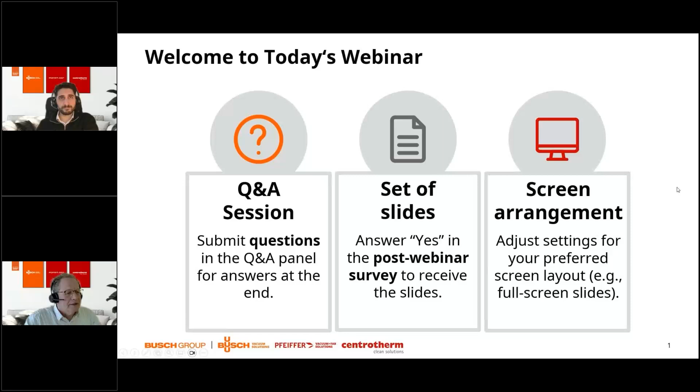Let me introduce your hosts. That is Özkan Güneş. He is Market Manager Analytics at Pfeiffer Vacuum, responsible for all makers of analytical instruments, because most of these instruments come with vacuum technology - pumps, gauges, everything. Özkan is very well aware of what needs to be done to equip GCMS, MS, or whatever kind of instrument with vacuum technology. Thank you very much, Özkan, for being our host today.

Yes, thank you, Andreas. And your second host is Andreas Schophoff. He is the head of the market segment R&D, and he and his team are responsible for the R&D customers of Pfeiffer Vacuum worldwide. This includes, for example, universities or research institutions that conduct research using vacuum technology. His role involves supporting these organizations by providing vacuum solutions to their scientific and technological needs.

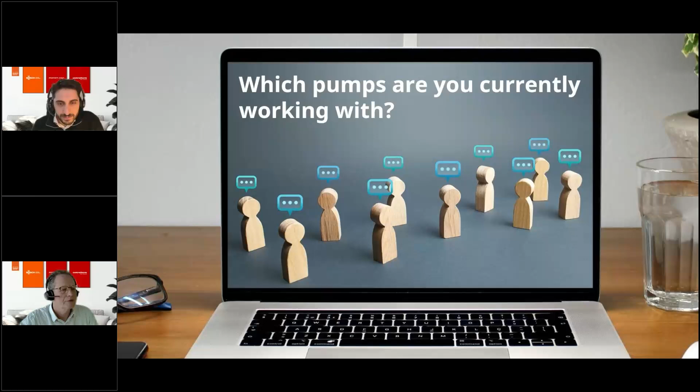Vacuum in a lab is an interesting thing, and we would like to look at, first of all, where actually vacuum is used, in what kind of instrument. We're looking at vacuum equipment, vacuum technology as a kind of enabling technology.

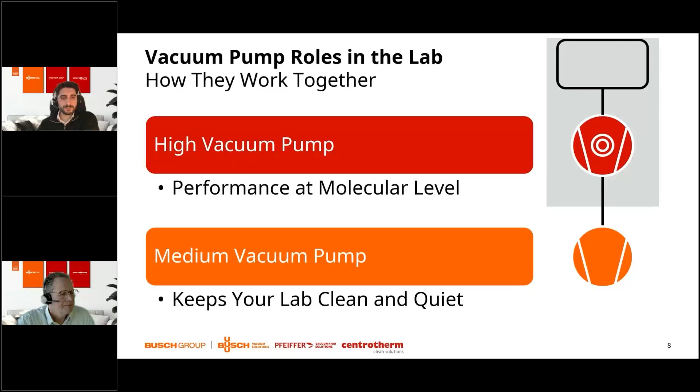And that can be anything. For you, we were thinking it's very important that this kind of pump is low noise, because quite often you're having more than one instrument in your lab, and you're very close to the instrument. So if it is clean and quiet, that could help.

So just to look at the typical parameters - one of the typical parameters is the final pressure these pumps can actually reach. Starting from left to right, we're looking at the rotary vane pumps, and there they generate vacuum starting from atmospheric pressure down to 10^-3 hectopascal. The diaphragm pump is a dry pump, but it cannot reach such a low pressure, let's say 1 hectopascal. The scroll pump is absolutely comparable to the rotary vane pump, and it can go down into the same kind of pressure regions.

The claw pump, yeah, that's another kind, but it's pretty big - you cannot figure that out. Multi-stage Roots pumps come into the 10^-2 pressure range, and a screw pump - but you can see here to the very right, all these kinds of pump technologies would be sufficient in order to combine with the turbo pump.

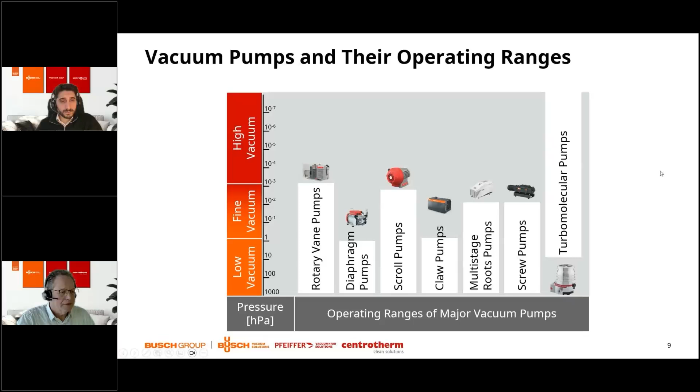Just to give you an idea, let's say you're having a vessel with 1 meter cube, or 100 liters, sorry, 0.1 meter cube, and you want to evacuate that, having a pump with 10 meter cube per hour pumping speed. Then it would take something like 2.8 minutes to get to 10 millibar from atmospheric pressure. And if it is just 1 meter cube per hour, then it takes just 28 minutes. Just to give you an idea how pumping speed affects the time used to evacuate such a chamber.

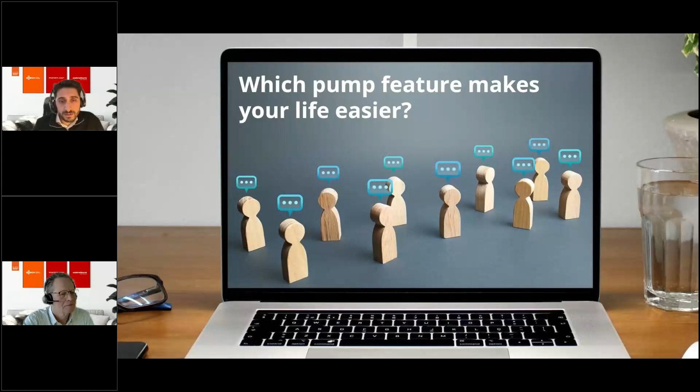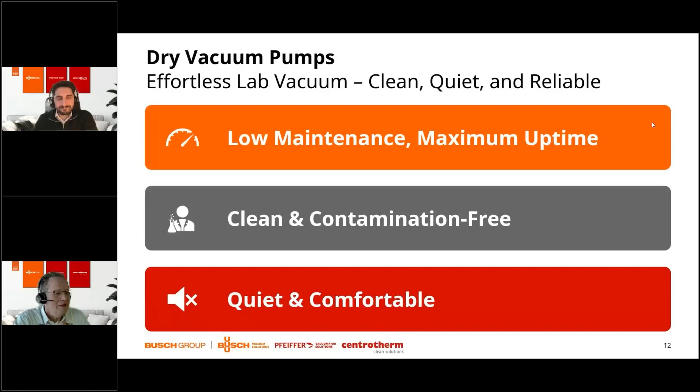Can show it in our next slide. Yes, very well, like you said, Özkan, it is very much what we have expected. So we're trying to read your mind up front. And honestly, I think we did a good job because, yes, we were thinking: what makes your life easier? Low maintenance, maximum uptime, so just switch on and forget.

And secondly, quiet and comfortable. That is something we've mentioned already. When you're very close to the instrument, when you're having maybe multiple instruments in one lab, it can be really annoying if it makes an uncomfortable sound. Clean and contamination free, then it already comes to your application. Sometimes it needs to be very clean so that your measurement is not influenced by any kind of oil backstreaming, something like this.

So thank you very much for coming up with the results we were guessing you would have in your poll.

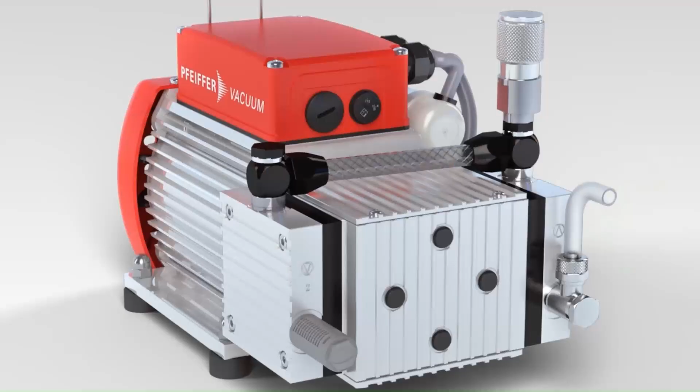Yes, and this leads us to the first pump among the three that we will present in today's webinar. It is the diaphragm vacuum pump, and we have a video to illustrate its working principle, where you can see a so-called MVP from the Pfeiffer Vacuum portfolio.

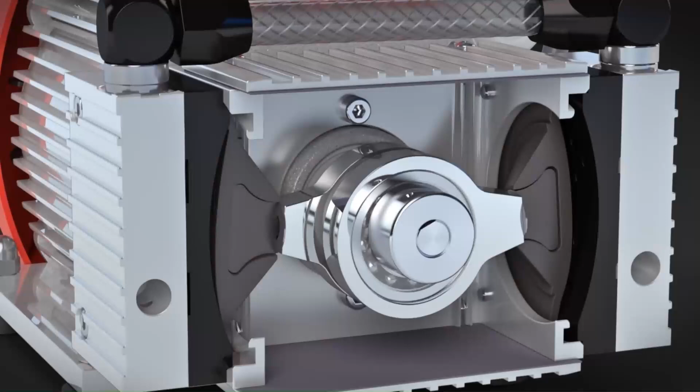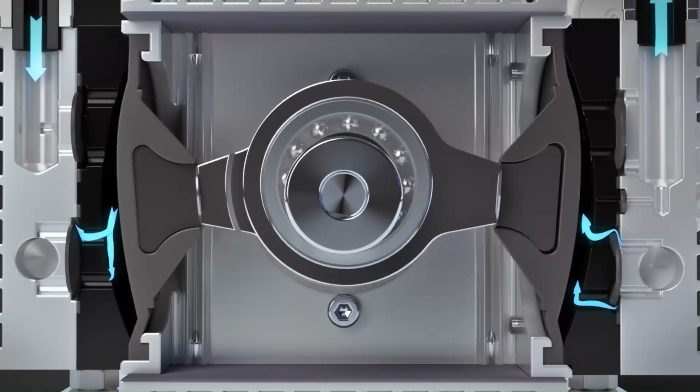So there we are. The blue arrows represent the gas entering the pump and making its way through it. But to understand how it works, we can take a look inside the pump. We see a crankshaft-driven rod that is moving the diaphragm up and down, or rather to the center and outward. We can also see that the diaphragms are moving in a wavy pattern to push the gas towards the outlet. And looking at these round valves, we see that they are opening and closing alternately, and when the inlet valve is opened, the outlet valve is closed, and vice versa.

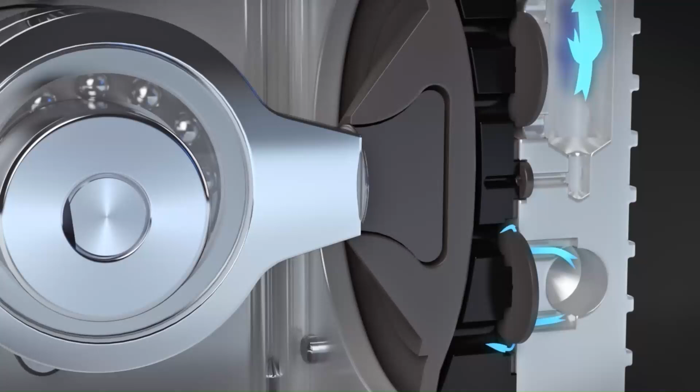And we can see the same diaphragm setup at the left side, meaning that we are dealing with a two-stage diaphragm pump here. It is important to mention that the final pressure achievable with the two-stage pump is lower than that achievable with one stage, because it is compressed with an additional stage.

So coming back to our presentation, we can see here some benefits and features of diaphragm pumps. First one is on-site service that is possible. It can be done by the operator, allowing the operator to easily replace the diaphragms and valves by himself.

We as Pfeiffer Vacuum recommend the diaphragm replacement every 2 years, but depending on the application, rarely used diaphragms can be changed after 4 years. This is also possible. It always depends on the application, on the gases that you are pushing through your pump.

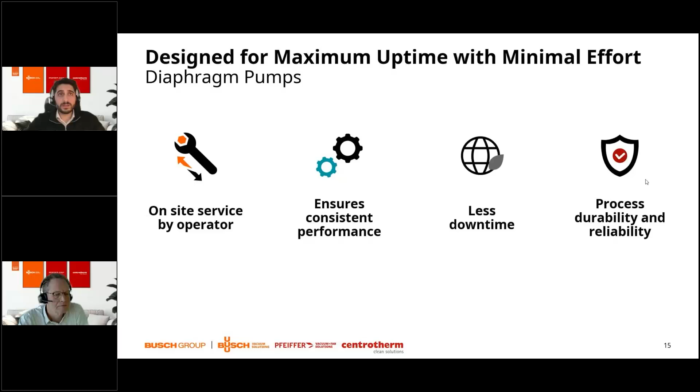You have less downtime as the diaphragm pump operates without oil, so it's a completely oil-free pump. You have a clean vacuum, and since no oil is required, you also don't have any oil changes, which is clear. The pump has a very high process durability and reliability. There is an integrated magnetic gas ballast, which reduces the risk of condensation, because condensation can be harmful to vacuum pumps by damaging the components of the pump, leading to a reduction in performance.

Furthermore, it is possible to have an automated gas ballast. This means they don't have to do manual adjustments. You can just tell the pump with this optional gas ballast to have gas ballast in certain intervals. It's just setting of some parameters very easily. You can also have a retrofittable piezo Pirani sensor, which measures the intake pressure, enhancing the functionality of the pump.

Quiet operation and low vibration. Noise always results from vibration, and this pump has low vibration, which leads to quiet operation ranging from 52 to 65 decibels. This is comparable to the sound of a normal conversation.

And last but not least, diaphragm pumps have a compact footprint, fitting well on workbenches without space concerns due to their small dimension.

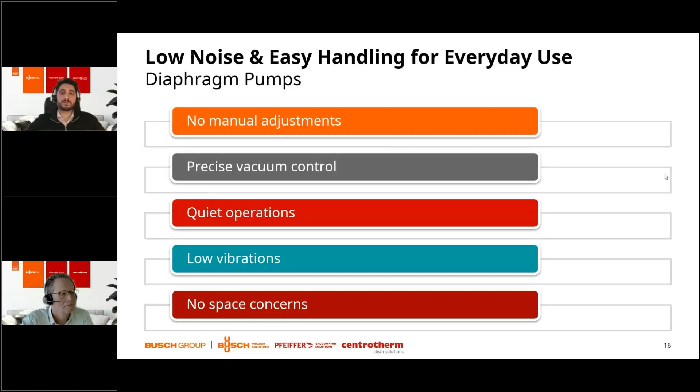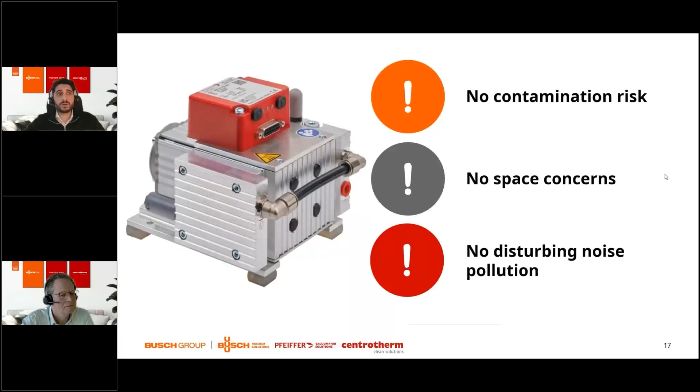So to sum up our key findings: we have no contamination risks, no space concerns as we have a very small pump, and also because of the low vibration, we have no disturbing noise pollution.

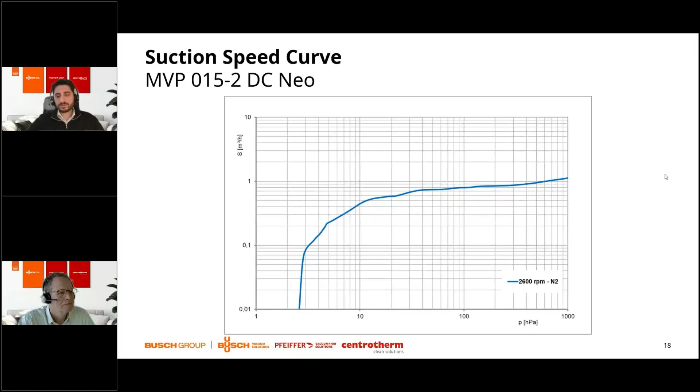And when it comes to some higher pumping speeds, you can take a scroll pump. Andreas, you are our expert for scroll pumps, could you tell us something about it? Yeah, thank you very much, Özkan. So let me talk about scroll pumps.

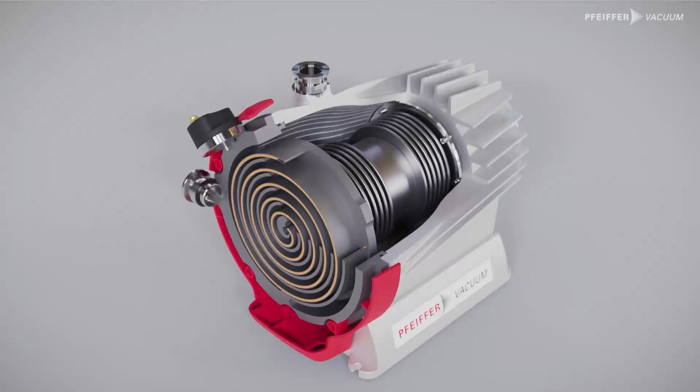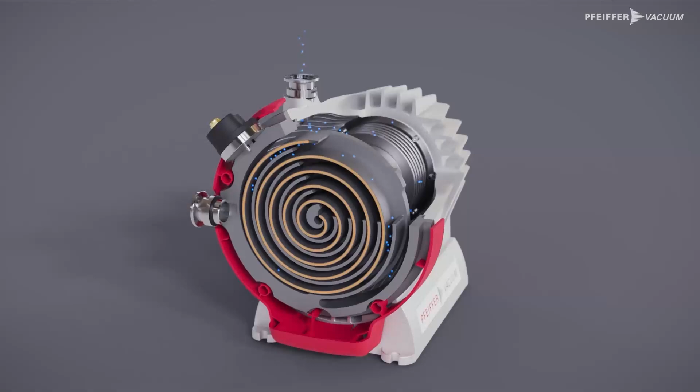That is, let's say, quite new technology when it comes to vacuum pumps, and I would like to explain how it works. Here again, we're having a bit of a movie, and you can see here there is a rotor and a stator, and it looks a little bit like a spiral. The light brownish one, that is a tip seal, which seals against the stator and the other way around, of course. Here you see very well how it works.

So the bluish parts, this is the gas, and the gas is being compressed from the outside towards the inner part of this spiral thing, this orbiter. And the great...

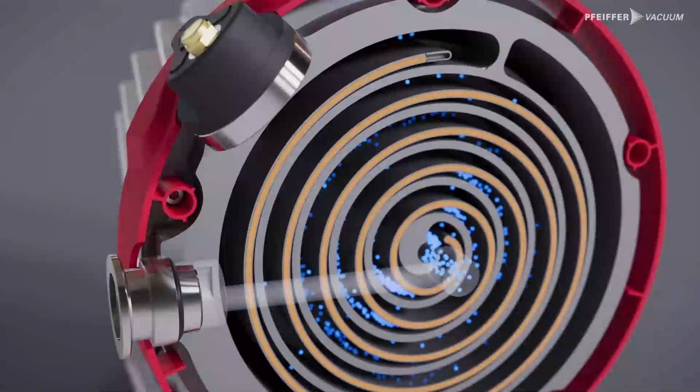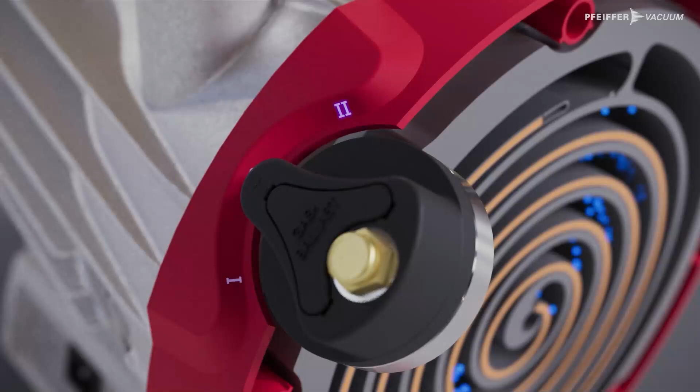invention of this scroll pump is that there are multiple compression stages. That means pretty much all these different gases like helium or heavy gases like nitrogen are being compressed in the same way. So if you're having a GC, for instance, and you're having helium, that doesn't really matter for this kind of pump, it works.

Here, that is the gas ballast valve, which is very good in order to get rid of the water vapor, and that helps to get rid of other kinds of vapors as well. Thank you very much, Özkan, for the movie.

Now let's have a look at the main features and benefits. Again, it is an oil-free pump, pretty much the same as the diaphragm pump. It has some built-in intelligence because the fan, for instance, the cooling fan is sensor controlled, so there's no overheating. There is no risk of damage.

Just to give you an idea, I mentioned that tip seal, and the pump is designed that way so even without a tip seal it could run. Of course, it would not have any kind of compression, but it would not be damaged. There would be no mechanical damage due to the missing tip seal. And therefore, last but not least, you would not have any kind of unexpected downtime.

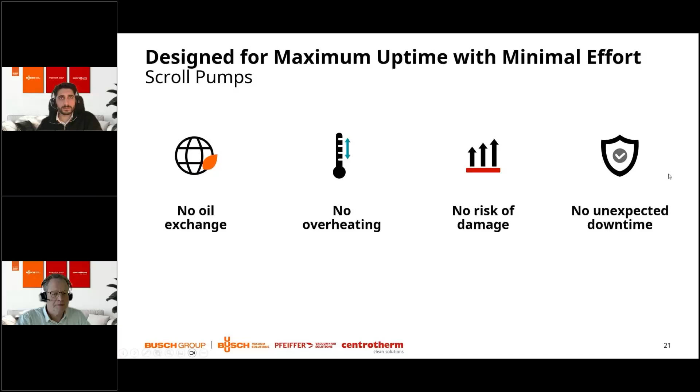So it would be very quiet, very low vibration. It is optimized for vapor handling. It has this smart operation, so with the help of built-in sensors, with the help of a gauge, it is very clever. The intelligence is already built in. It has this seamless integration, if you want, together with the turbo pump. A little cable in between that will help.

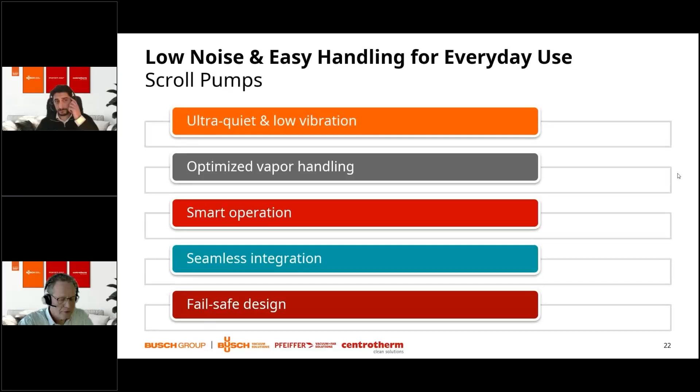And it is this fail-safe design. So even without taking too much care, it will not be damaged, even without having any kind of tip seal. So in a nutshell, there is no contamination risk because there's no oil. Even wrong operation would not have any kind of risk that oil or hydrocarbons would get into your analytical instruments. There is no oil spill underneath because it doesn't come with oil.

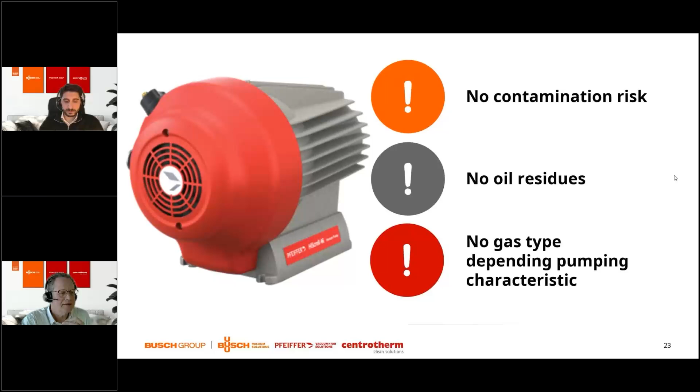So it is the perfect drop-in replacement for oil-sealed pumps. For all these people who would like to get rid of oil-sealed pumps, where they very often need to do maintenance, oil exchange, or deal with oil spills, this can be the perfect drop-in replacement.

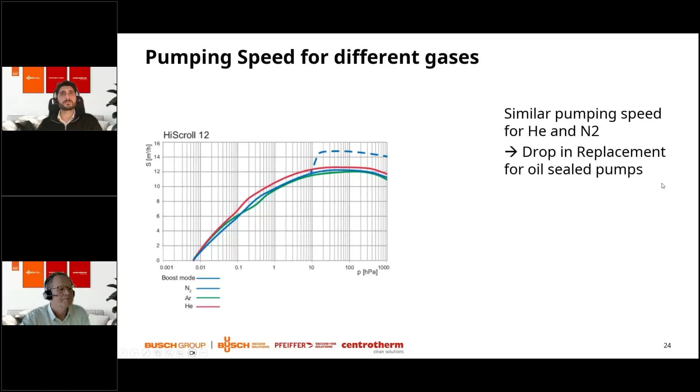Okay, it's gone. Now back to you. You would like to introduce the multi-stage Roots vacuum pump.

Correct. Exactly. So this is, let's say, the biggest pump among the three that we are showing you today, which can reach the highest pumping speeds. And also here we are having a video to get a better understanding of how it works.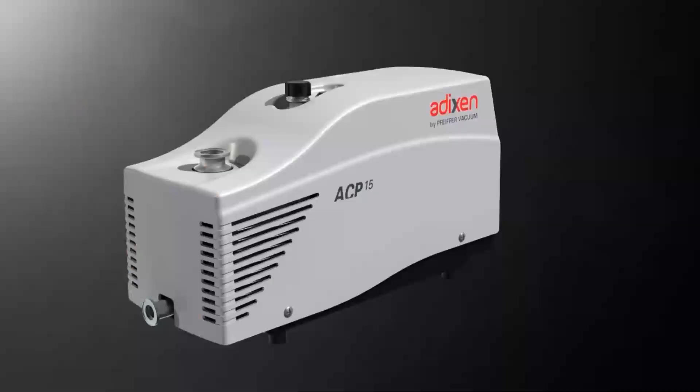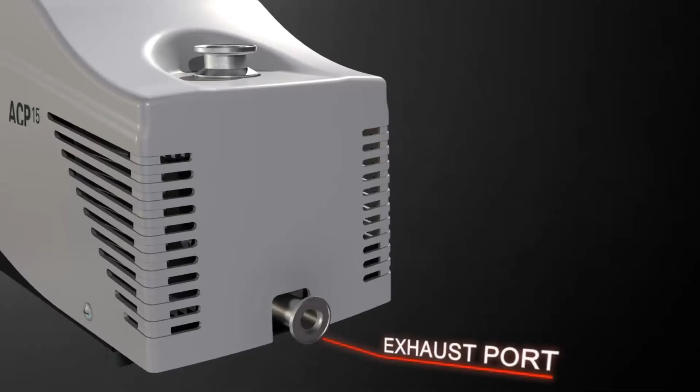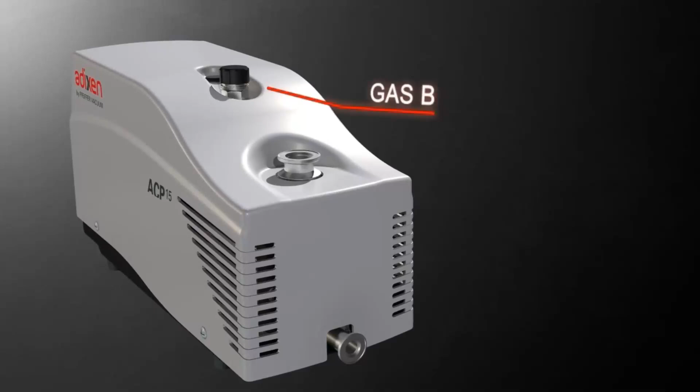And there it is. This is an ACP15 from the Pfeiffer Vacuum portfolio. We can see the exhaust port on the bottom side, the inlet on the top side. And looking at the rear side, there is a frequency inverter and an air cooling system. Also here we have a gas ballast on the top side. To understand how the pump works, we will take a closer look inside the pump.

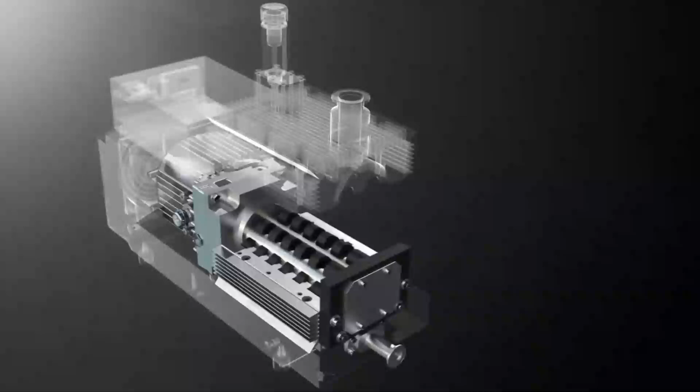And there we see two synchronously counter-rotating rotors. They are rotating contactlessly without any friction in a single housing. And the rotors have an 8 shape, meaning they look like an 8, and they are separated by a very narrow gap. And as the rotors spin, the gas is drawn in through the inlet and enters the pump.

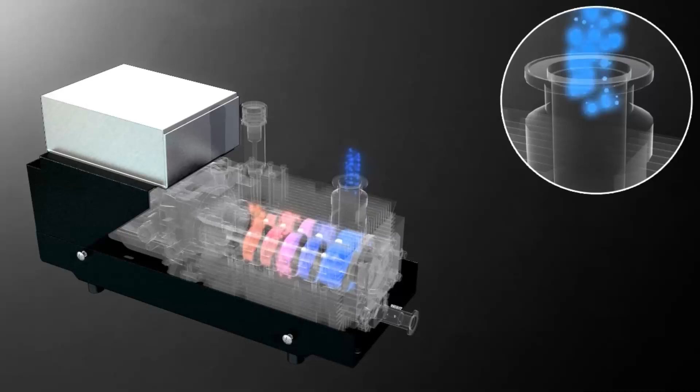Then we see it makes its way through all these stages. And stage by stage, it is getting more and more compressed, which is shown here by the change of color from blue to red. This stage-by-stage compression results in a higher pressure differential and an improved overall performance.

Features and benefits of multi-stage Roots pumps. As mentioned before, we can reach very high pumping speeds, meaning that you have a very short pump-down time. As mentioned in the video, there is no friction in the suction chamber, allowing the multi-stage Roots pump to be operated at speeds up to 6,000 RPM and allowing for rapid evacuation due to their high pumping speed. Optimized efficiency means that these pumps maintain low power consumption despite this high pumping speed.

And as shown in the video and explained, there is no friction between the rotors, which eliminates mechanical wear. Also, this pump works oil-free, so no oil changes are required. And despite the high pumping speed, it has a space-saving footprint, making it very easy to integrate into laboratory environments.

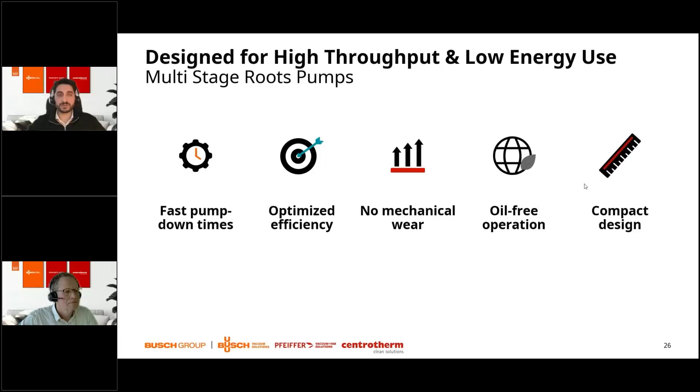Furthermore, constant vacuum stability, because they offer consistent vacuum stability, ensuring the user reliable long-term operation. They can be continuously operated at high inlet pressures, which is no problem for them. And the frequency converter, shown in the video, enables the operator to optimize energy consumption and reduce the noise level. It is available in both single-phase and three-phase variations, ensuring consistent operation parameters regardless of the power supply or the mains frequency.

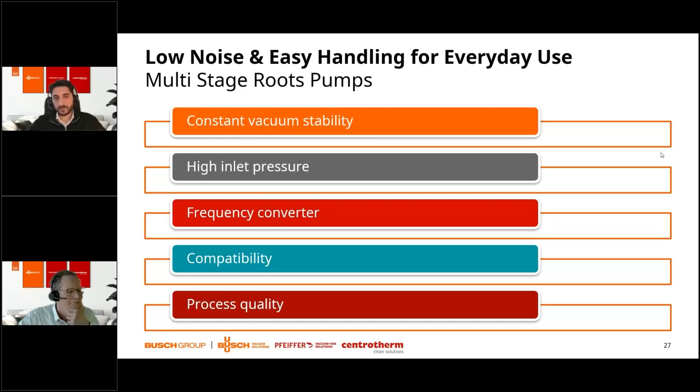You achieve excellent process quality performance due to the particle-free and oil-free operation. And also here, again, our key findings for this pump are: no contamination risk, and because of the frictionless operation, we have no mechanical wear and no particles in our vacuum system.

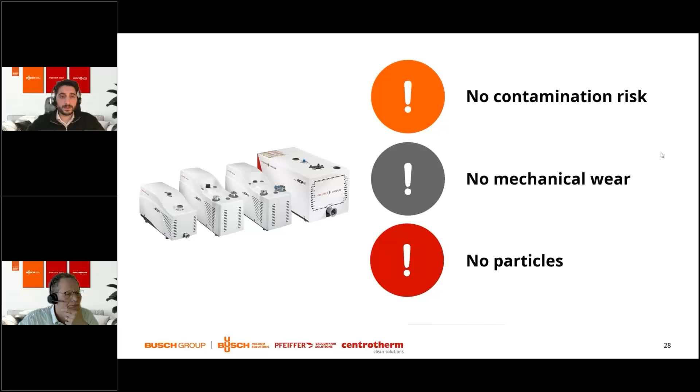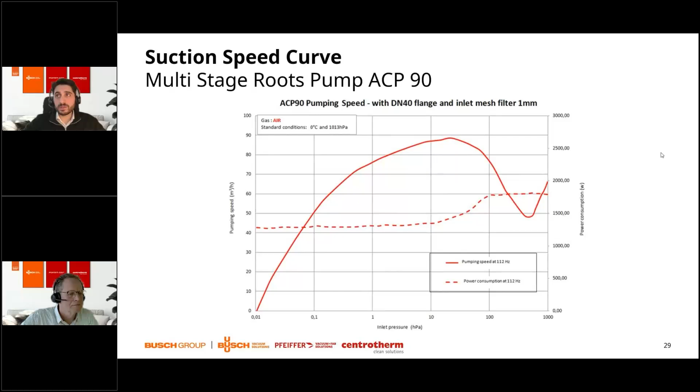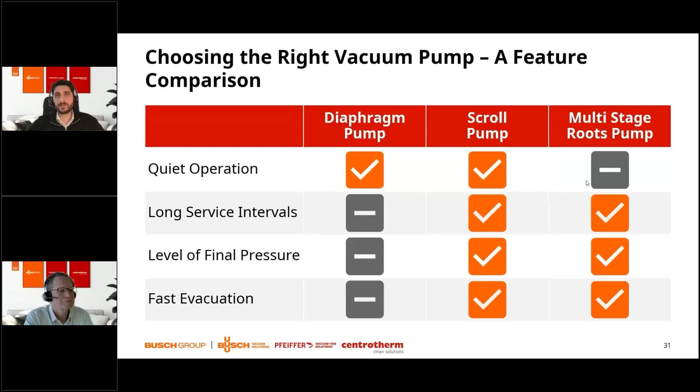In the next slide, we will show you a video just to give you a feeling on how these pumps sound like. So there it is.

Very good, Özkan. That was absolutely impressive. Yes, thank you, Andreas.

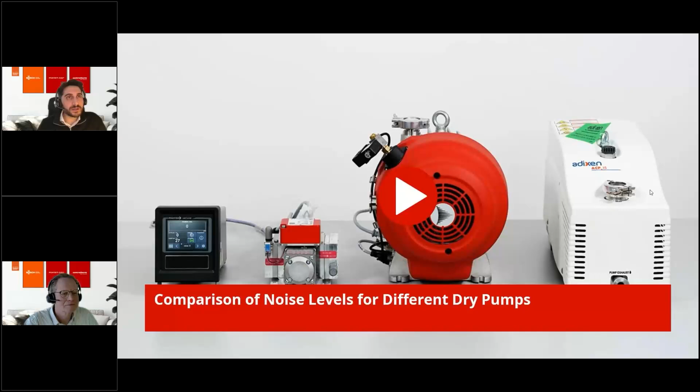Just to give you a feeling on how the sound is. It's very difficult to get the sound level, but to show you or make you listen about the sound, I think it's a nice video.

And yes, optimizing lab vacuum. Now Andreas will give you some tips to maximize your pump lifetime, and he will also show you an opportunity to save some energy with the scroll pump.

Okay, thank you very much, Özkan. So let's start with the energy. I know that in North America, energy saving is not really something that is very important, but at least over here in Europe, it is important. So we did look at it, but I will keep myself short.

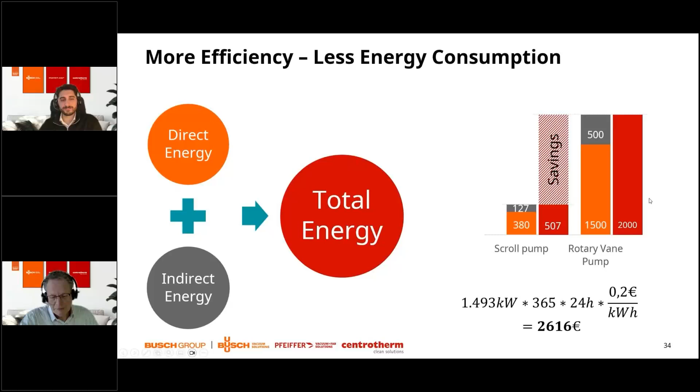I know that is a bit of a different story. I was told in Tennessee, 1 kWh of electrical energy is about 8 cents. So that is a bit of a different story, but maybe one of these days that could be interesting for you guys as well.

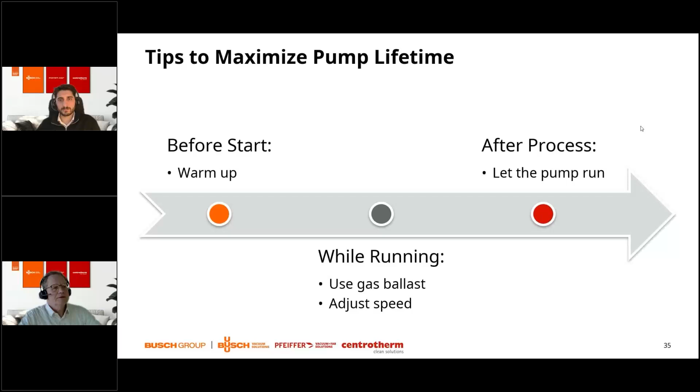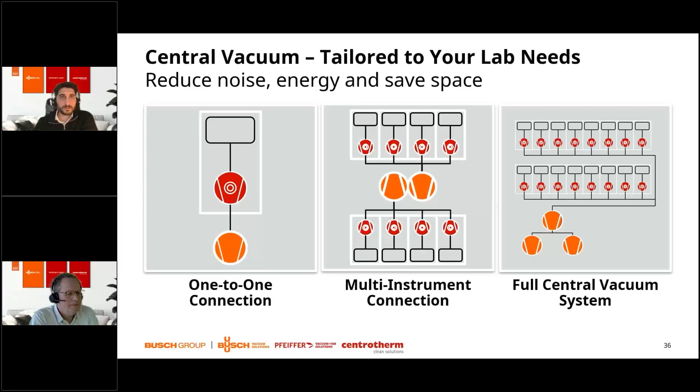The one in the center is showing multiple instruments with just 2 backing pumps pumping all these instruments. As I've mentioned, that can be a good idea when you have the piping to have just 2 backing pumps connected to all these instruments.

So just to summarize, these different scenarios can make your life easier. For the time being, you might have just this one-to-one connection - we are just suggesting it could be worthwhile to think of different solutions.

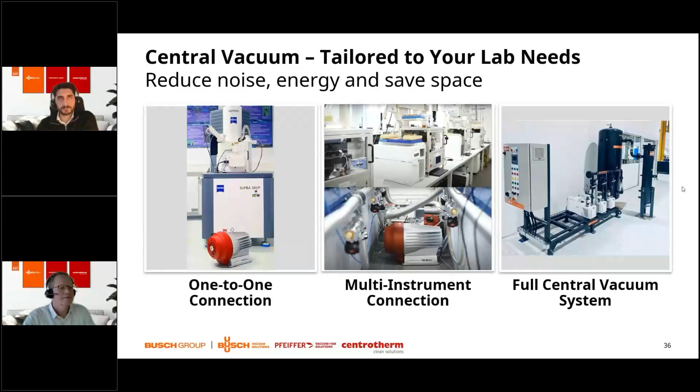Okay, it has been a long time since our last poll, Andreas. Yes, now it's time, Özkan. May I introduce Özkan the sorcerer? Imagine he has a magic wand in his hand - if you had one wish, what superpower should your pump have? Özkan can actually make it happen. So that's the question: what kind of superpower of your pump would you like Özkan to realize?

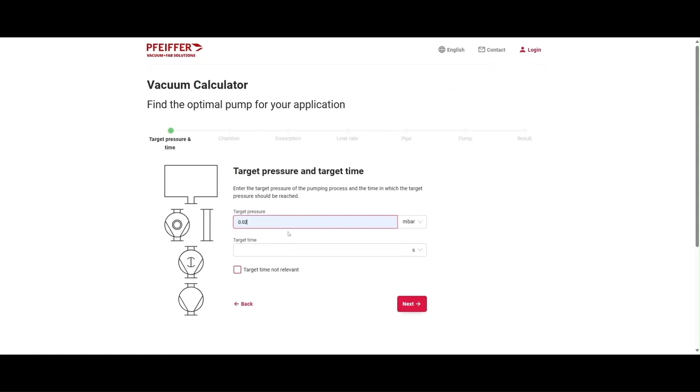Then we click on evacuating a chamber, and the tool asks us to give some parameters. We say that we want to reach a pressure of 2 times 10 to the power of minus 2 millibar, and for this example, for simplicity, we say the target time is not important.

And the next step is defining the geometry. We just say that we are having a cubical chamber with these dimensions. We click on next, then there is the desorption rate.

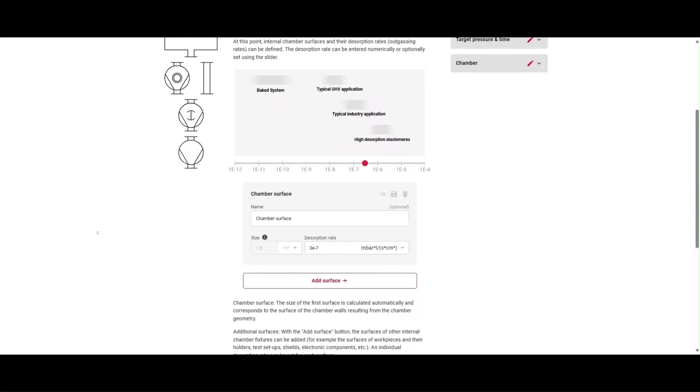Here you have the option to add some surfaces, but as this is an example, we will just skip this one and calculate with the standard value provided by the system. We do the same for the leak rate, as there is a value already in it.

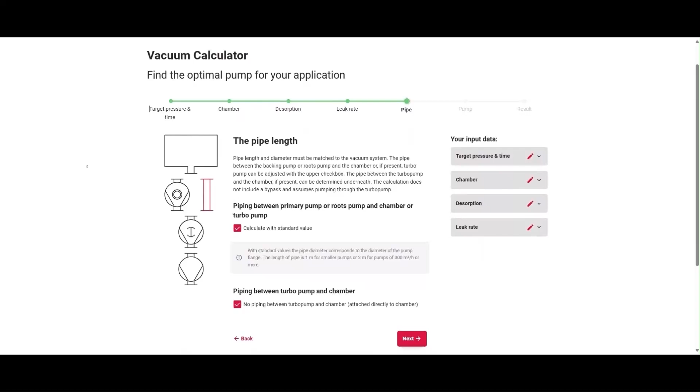And for the pipe length, we also calculate with the standard value, and we say that there is no piping between the turbo pump and the chamber.

As we are having only dry pumps in this webinar, also here we are choosing a dry pump, and we ask the system to propose equal numbers of backing pumps and main pumps. Of course, this is just an example. It could be that your application looks different than this one here.

And there it is, the system or the application is recommending a HiScroll 6. If you click on it, you will be directed to our digital catalog where you can choose between the pumps. It is important to mention that this is just a tool to give you a first impression. It does not replace direct contact with our sales engineers, but to have a first idea, it is very nice to use.

So now we are nearly at the end of our presentation. It's time to have a recap, Andreas. We had these three bullet points which were understand, explore, and learn. Could you maybe recap on our achievements? Did we reach the goals? What do you think?

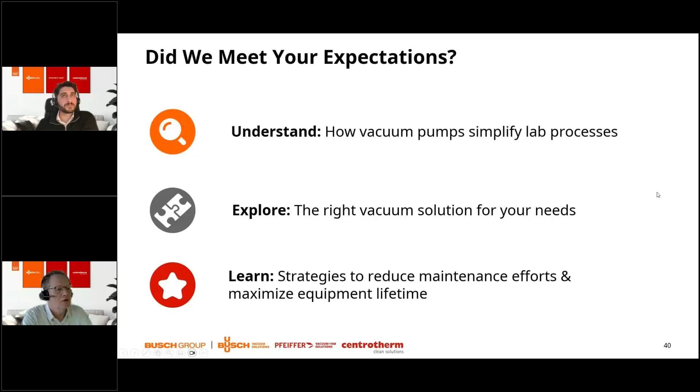Yeah, thank you very much. You guys remember we were thinking this could be the expectations you're having on that webinar. Of course, we couldn't have asked you up front, but we understood, yes, it could be the best thing you can expect, to understand how vacuum pumps can simplify your lab processes. So we did explain how it works, what are the features and benefits, what is the actual situation, in a nutshell, how it works. So I think we did let you have an understanding of how the pumps are working and how they can simplify your process. So suction speed, noise, maintenance, and final pressure, all that we were talking about.

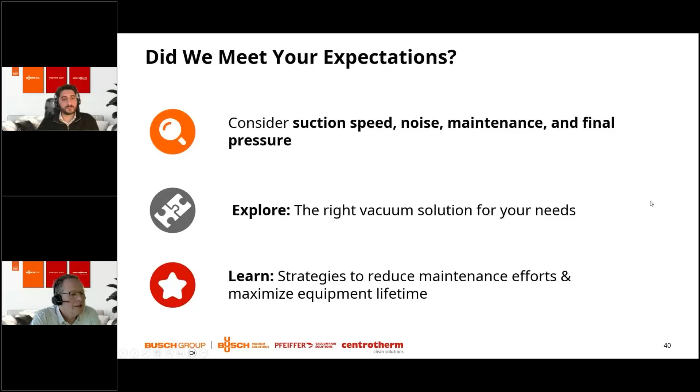When it came to explore the right vacuum solution for your need, we did mention clearly, yes, there is not one perfect pump for it all. I mean, yes, we do have a sorcerer here amongst us, Özkan, but still, it is not the perfect pump on the market available. So we were talking about other kinds of solutions like centralizing, and we were looking at the vacuum calculator tool, which is free to use. You can play around with it, and it would be great if you could let us have some feedback.

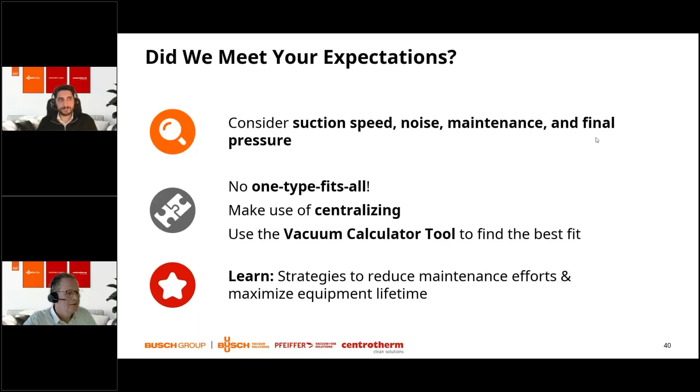Then learn, we said yes, it is advisable to warm up the pump and to use gas ballast and speed control, that makes it even quieter in your lab. So I hope you all will agree that we, or me personally, I think we did achieve the expectations. If not, please don't hesitate to reach out to Özkan or me or anyone from the Pfeiffer Vacuum organization for further discussion.